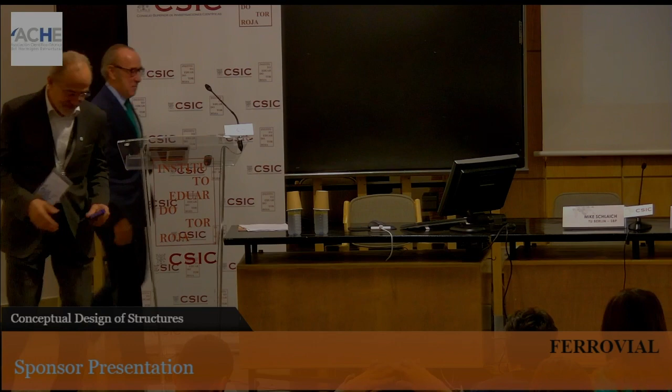This is the, let me see if it's

Okay, very good. So again, inspiration is the motto of this section of the conference. I want to tell you a little bit about a few engineering cases where inspiration came to us, and we were able to modestly push the envelopes of our work as engineers. And as you know, when inspiration comes, they say that it needs to find you working. So after every inspiration, the engineer's work means that you still have to spend many, many hours developing your design.

First, just a little bit about Ferrovial. Most of you know us. In operation since 1952, market capitalization around 19 billion euro. These are the countries where we have a presence in the world, and we are very focused on the USA nowadays, which represents more than 40% of our activities. So that's all that I want to say about Ferrovial.

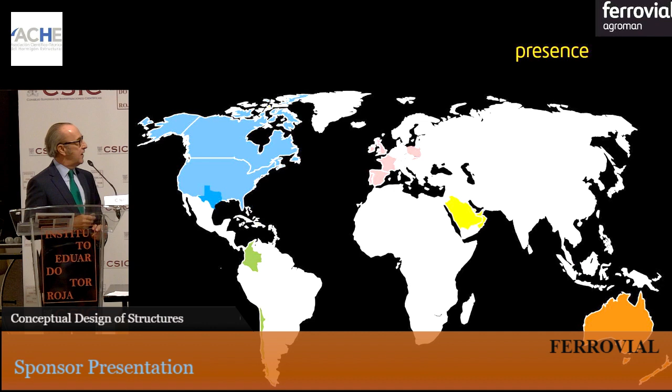Let me move on to the inspiration examples. I think we are running short of time, so I'm going to skip this one. First inspiration, structural, and as you will see, I'm going to go from the more small scale examples to the larger scale examples. And if you bear with me, I will finish with a very large scale example, which is not strictly related to engineering, and then with that I will end my presentation.

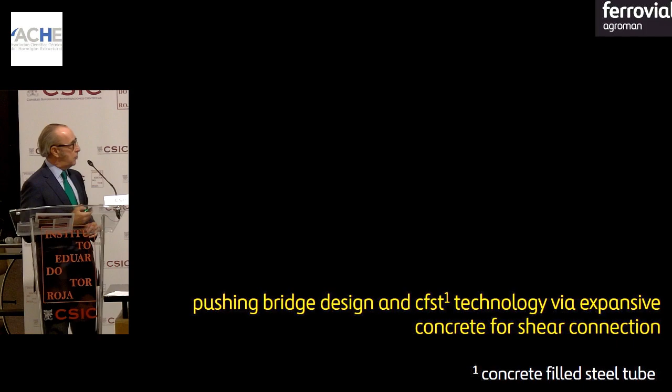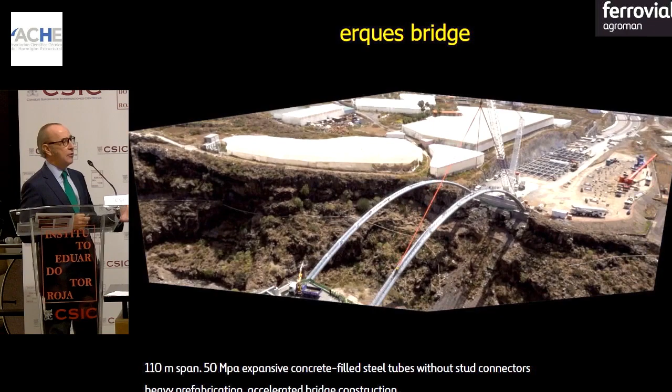So first case, a structural project. This is a bridge in the Canary Islands that we designed in-house. By the way, we worked on some of the testing that I'm going to show with the Instituto Eduardo Torroja, and it's the first example of inspiration. You can see the bridge relies on modular construction, heavy prefabrication. It's almost verging on the field of ABC, accelerated bridge construction.

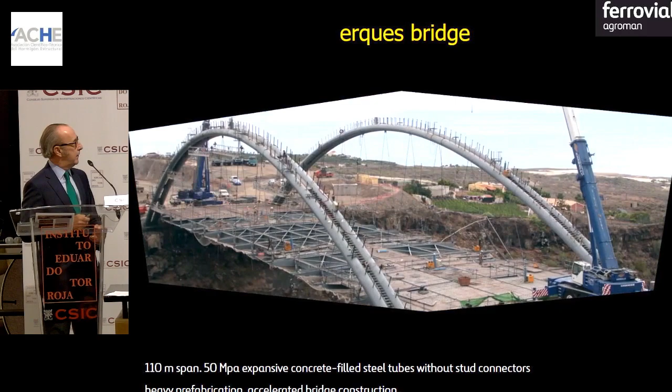And I want to focus on the 4 steel tubes that are supporting the deck. Once the video is over, I will tell you a little bit about it. As you know, traditionally, engineers have relied on shear studs or shear connectors to make sure that the concrete inside the steel tubes and the steel work together. I have here a little prop. So just to make it more fun, this is a real scale size of each one of those steel tubes. You can see the concrete inside and the connector.

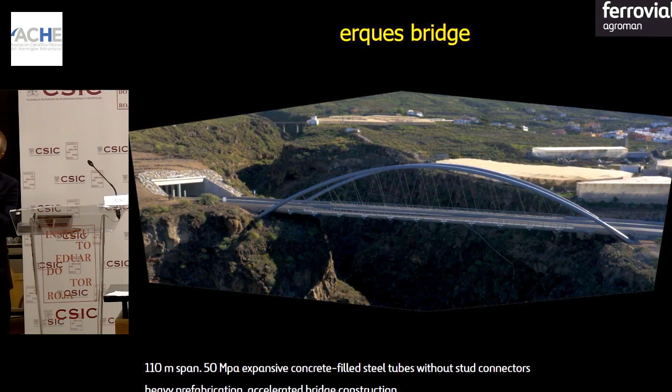So here the inspiration was, can you do something with expansive concrete, to try and get rid of the shear studs, and of course with a proposition like that, as the responsible engineers, you need to start testing. These are the tests that were conducted at the Instituto Eduardo Torroja. Of course, you need to model temperature effects, both uniform and non-uniform heating, to make sure that there will be no slip between the two materials. And in the end, this was the result. Concrete filled steel tubes without stud connectors.

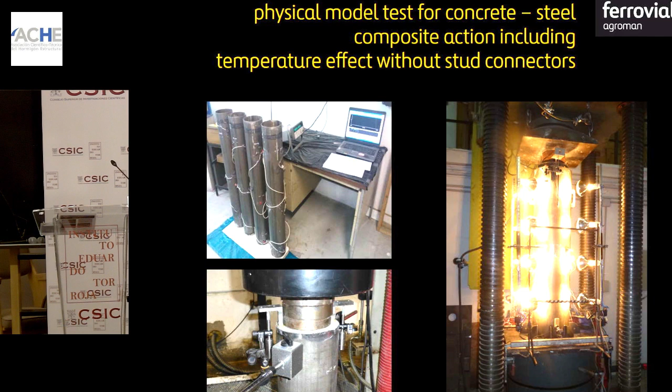And I thank very much Javier Gras, who's here, one of my collaborators, for carrying this over all the way

from the office. So next, going up one step, we are moving more into the field of conceptual analysis of potential engineering solutions. As you know, soil structure interaction is an important issue. Hugo is going to remember this case because we worked together on this problem. Here we modestly pushed the boundary of soil structure interaction, making geotechnical models and structural finite element models work together.

As you know, geotechnical FE models can be very good at depicting the soil properties. You can make them as complex as you want, nonlinear soil behavior. You can have the piles slide with respect to the soil to model negative friction, what have you. But those models are not so good in representing the structure. And for structural FE models, the opposite is true. So this was the first case where we coupled both models together. And this is a view of the geotechnical part of the model.

I'm going to run a very simplified simulation. This, so to speak, would be the first iteration, in FLAC, the geotechnical FE model, where the building is modeled in a simplified form. The drilled shaft foundations are modeled in great detail, and then you start the execution of the two tunnels that are going to run under this building, and in so doing will cut through 67 piles of the foundation.

It's a partly historic building in London. It's partly, as I said, classified as a historic building, big structural masonry walls. So of course you want to make sure that nothing happens to the building, and you need to evaluate potential damages and design mitigation activities.

Red here is good. Sorry, it should be the other one. Red is zero settlement. And now we start the excavation of the tunnels. Of course, you see the arching effect of the building, and in doing so, you can calculate essentially the reactions, the loads that each of the

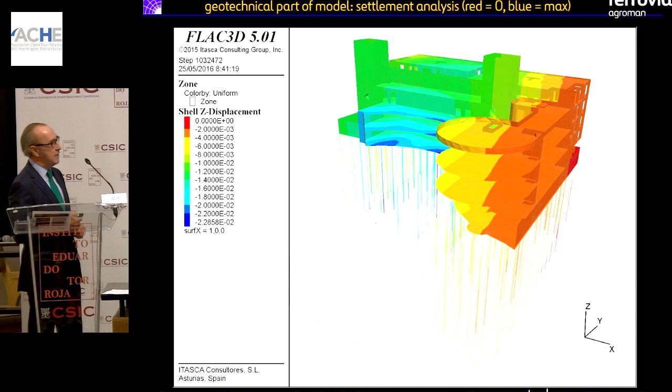drill shafts is carrying. Of course, prior to a model like this, there was extensive pile load testing on the site, because with such a complexity, as engineers, you need to make 100% sure that you are representing reality. This is the structural part of the model. This was done in Sofistik.

You can impose the movements of the drill shafts onto this model, which is much more detailed from a structural standpoint, and then you can run the structural part of the model, obtain the reactions on the drill shafts, and then the process starts again. And at this time, we did the combination of both models in a very crude way.

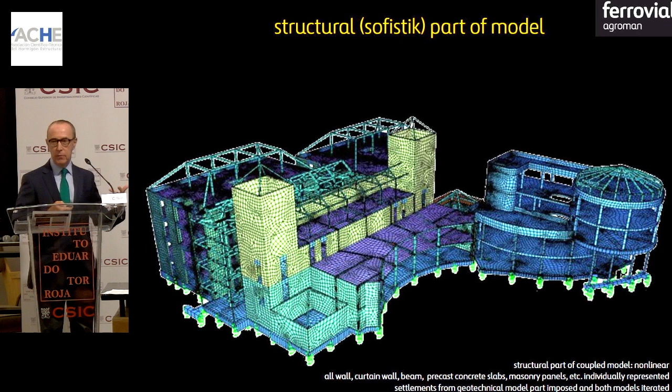Nowadays, software has been developed that can make them run seamlessly, and you can cycle through as many iterations as you want. This opened a completely new set of opportunities for us, and we have used it in several complex geotechnical structural analyses. And of course, ultimately, you can check your failure criteria, in this case for some of the masonry walls in the building.

Next example, and this has nothing to do with structures. It's really from my own field. And we're going one step further in terms of the scope of the project. This really is looking at the whole concept of how the project should be conceived. Two important concepts here. Public-private partnerships, or PPPs or P3s, are projects which involve not only construction, but also the financing and the operation and the management of the asset over many, many years.

This is, in particular, a toll road in Dallas, in the USA, and there are two interesting concepts associated with this type of P3 that our company has developed many times in several places, including the US. Traffic risk means that your revenue is associated to how many cars drive on the facility. So in a project like this, a concessionaire should act as if you were the owner of a restaurant. You want to entice customers to drive on your facility. You want to provide a good service so that they come back.

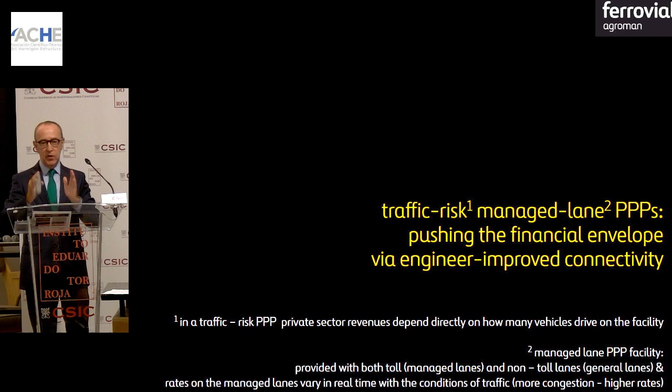times to your users. So in a case like this, the challenge is you want to try and provide as good a service as possible and improve connectivity. And in this example, the construction cost of this project was approximately $1 billion.

You can see on the left, I don't know, is there a laser here? Oops.

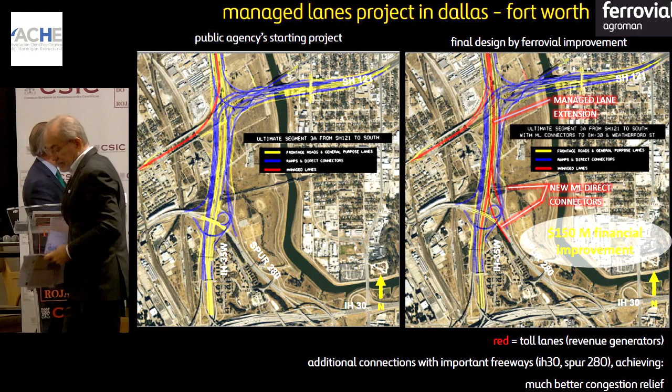Good, okay, excellent. So you can see red is the important color. Red are the managed lanes. These are the toll lanes, the lanes that generate revenue. This on the left is the project as we received it from the public agency. The toll lanes go into downtown Fort Worth, and a very key aspect.

You see here IH-30. This is a very important transportation corridor between Dallas and Fort Worth, key in the area. This project was not doing anything to reduce congestion in this important interchange or alleviate congestion on IH-30. Why? Because really the challenge, it's not that the people who thought about this project for 15 years, maybe they thought of it, but there were two difficulties.

One is the land occupation. It was difficult to get additional right-of-way for construction in that area. And also during the public planning process, quite often, there is not an advocate to treat a project like this as a business. So our solution, this is how the project has been built, is shown on the right.

Managed lanes were extended down farther south, and really this is where the inspiration came, that there was this little section of freeway, Spur 280, already connected to IH-30. So the eureka moment here is to connect the managed lanes to this short spur, and this is what provided complete connectivity with IH-30. Nothing to do with the structures. This is a simple idea, but someone has to see it.

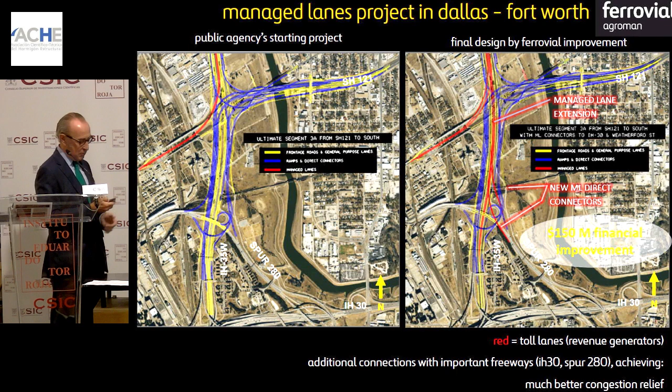And I think I have the last example, very removed from the field of engineering. Please bear with me. I was reading the definition of inspiration in many dictionaries, and there is one thing in common. Inspiration is a motion not only on the intellect, but on the heart as well. You can be inspired to altruistic behavior, you can be inspired by a person, and to me, what I'm going to show is a big source of inspiration.

And I apologize because it is very removed from the field of engineering, but after the excellent presentation by Mike Schlaich, what I'm saying here is very humble. This is not anything that has to do with my potential achievements, but it makes me very proud as a human being and as an engineer, and it's a big example of how good we can do professionally.

I wanted to leave the group with this idea, hoping that the sessions in these 2 days are very fruitful, and convey my thinking that to me this has always been a big source of trying to be better as an engineer and serve society. And on the other hand, engineering is a lot of fun, so on the selfish side, it's important too.

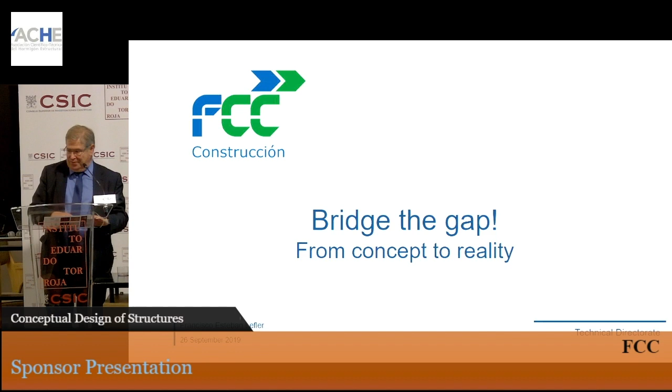With so short a time, what can I say? I decided to choose 5 flashes of 5 activities that we lived, interesting concept designs that went into reality, where FCC, together with the consultants and the engineering, solved problems that sometimes arose during execution and were not directly derived from the conceptual design. I'm sure Professor Corres will recognize some of his really nice values in these activities, and some of the attendees too. I will go a little bit fast through this.

I will talk first about the Mersey Bridge. The Mersey Bridge is a real structural breakthrough within a challenging environment. It has just been awarded by IABSE the Outstanding Structure Award in 2019. You can see from the picture it's a cable-stayed bridge with 3 pylons, but it is also placed in a very sensitive environment in estuarine waters.

That means that the ecosystem where the bridge is placed is extremely sensitive, with a really complex biological structure, and it was a real challenge just to be able to tackle this complex structure in such a complex environment. Of course, the bridge was addressed with the technical tools needed for the structure, but in parallel there was an environmental management scheme that was key in going from the concept design to the reality.

The construction was carried out by balanced cantilever with a temporary trestle, and obviously this trestle was on piles, and after finishing everything had to be removed. The aim was having the minimum interaction with the water flow, the water dynamics inside the estuary, and once the structure was retired, everything was recovered.

In parallel, several PhD theses were performed and sponsored by the construction JV on the ecological values of the area. And also, there was a continuous interaction with the population in the surroundings. There was communication in both directions that really made this work a success.

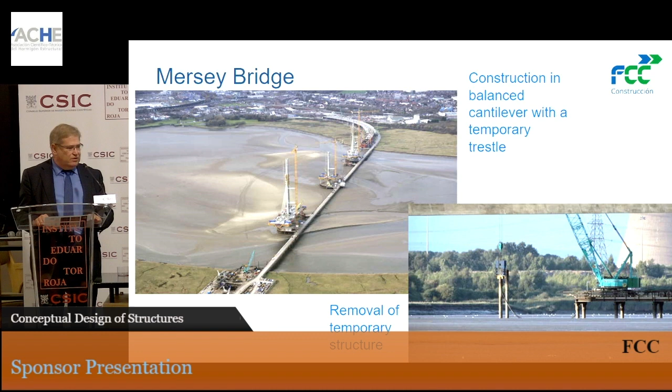Another one is the Almonte Bridge. This is a high-speed railway bridge. It's an arch with 384 meters of span. When it was finished, it was a world record in concrete bridges for high-speed railways, and now probably there are other bridges with some more span. And the cross-section is quite complex. From two hexagons that are separated at the abutments, they go to a single octagon at the key. That's why it's a little bit complex. It was overall winner of the ACI Excellence in Concrete Construction Awards in 2018.

You can see at the center the change in the formwork from the section at the abutments, changing smoothly to the octagon. You can see at the right the transition. It was a complex formwork that we were advancing there. And the construction was carried out by two cable-stayed cantilevers.

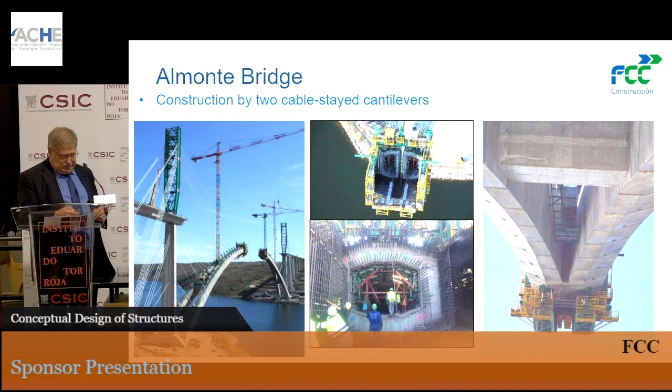And there came a structural challenge from the construction process, from the method statement: obviously we needed temporary towers for the stay cables to be able to connect the bridges. That was very complex at that site, and the key of our in-house team, the special works team, was a really ingenious frame that allowed us, by vertical rotation, to place the erection towers that served for the auxiliary cables to be able to construct this bridge.

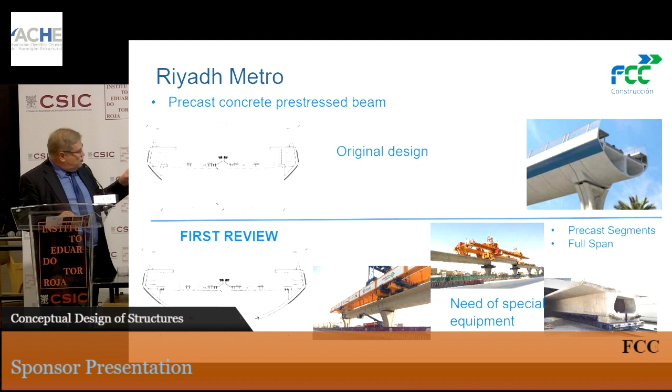Another experience is the Riyadh Metro. Here we will see the interaction of the construction equipment with the design. The original design is up on the left, with a really complicated beam for handling, for pouring the concrete, for placing it. And some of the lines were directly constructed with this solution. But in our line, our construction joint venture decided to go a little bit beyond, trying to simplify. Then with our engineering partners and our in-house engineering, we did a first review changing that complex beam for a caisson beam where the webs were closer to the loads of the railway, and structurally it has some advantages.

Several sections were built with this solution, with precast elements for the full span sections. The question is that we had several lines with a lot of this kind of viaducts, and this solution required very special erection equipment. Special erection equipment means it took time and a lot of money to have many more teams available on site. So in order to strengthen and make the construction more reliable, a further step was done.

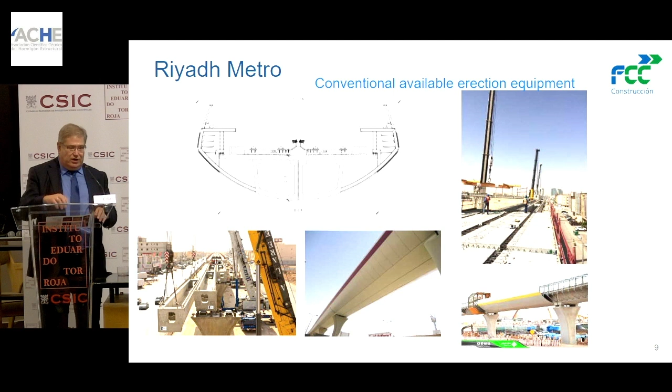That's splitting this big caisson beam into two half beams, so the section could be addressed with conventional erection equipment. That means a more robust structure. It's easier to replace a crane than a launching gantry, and this allowed us to tackle the challenge with more reliability in time and in cost. Obviously, it was necessary to recover the original aesthetics. That was no problem. You can see there how it was recovered; it is practically the same as the original design.

Another experience was the Fernando Reig Bridge in Alcoy, where the project consisted of the replacement of the full set of cable stays of a cable-stayed bridge that had several decades of life. There was a breakage in one cable, there was a structural inspection, and then the administration decided to change all the cables. Then we started to work together with the designers, thinking about the problem.

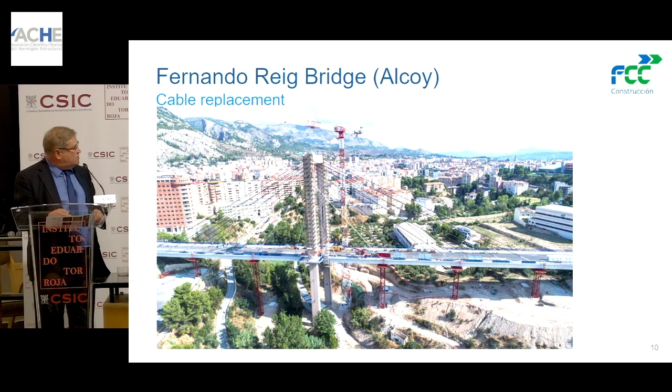A procedure was developed, of course, of releasing the tension while controlling from the towers behind with jacks, controlling the reaction in the adjacent cables. But in the next stage, when we were going to release that tension, it happened that the tension could not, in general, except in very few cases, be released as it was prepared, with the jack simply taking the cables with the clamps.

There was a general lack of free length for anchorage, and also some of the cables were corroded. And then everybody had to think a lot to go for another, more comprehensive solution. Well, the final alternative method was based on friction clamps to take the cable, with a capacity of 5,000 kilonewtons, actuated by jacks and rods.

So the procedure was the removal of the duct that protected the cable and also of the cement grout, because there was no friction capacity for working with the clamps. A special compound was designed for filling that gap and clamping the ducts. And then with post-tensioning bars, the tension was transferred to these bars.

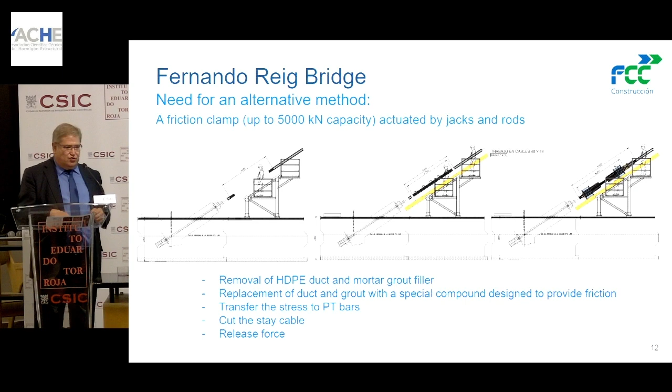Then the cable could be cut without tension, and then the tension could be released smoothly, reproducing the general structural scheme. You can see there the device with the clamps, the post-tensioning rods, and all this situation. Well, we have to say that the scheme was really successful.

Now I will go to a couple of R&D projects. R&D projects seem closer to the scientific side, but from the construction part, from a contractor company, the so-called valley of death seems wider. But sometimes with a good interaction with the researchers, if you fix well real problems, you can find answers in the research.

There's one paper from the 1930s called "The Usefulness of Useless Knowledge." Sometimes researchers are researching topics whose clear application they don't really know, or which are the answer to real questions in the industry, and that communication is sometimes very fruitful and provides very good results.

This is a centralized system. It's an R&D project that's ongoing now. It's a system for monitoring linear infrastructure construction based on, well, here we say high-performance drones. I would not say that after hearing the presentation by Professor Ratti. They are simple drones, and one of the aims of the project is the development of the drone itself, a drone capable of a lot of data collection and of inspecting linear works.

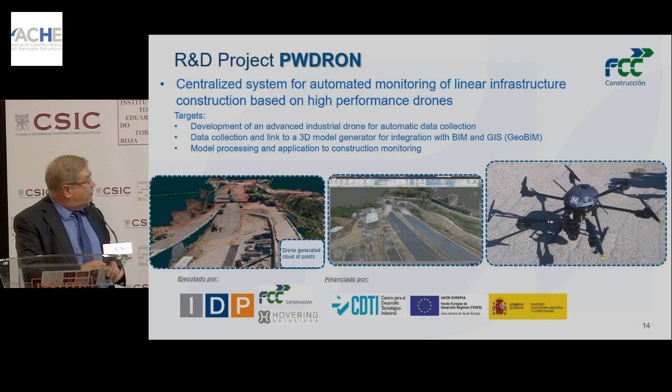In this case, you have to perform maneuvers of towing caissons, placing them by sinking and ballasting with salt water, with an accurate placement. So you have to build a breakwater that's a straight line with reasonable tolerances between caisson and caisson. And in many locations in the world, this is a really difficult job because you have very few weather windows where you can work with this accuracy.

In this case, this project was defined after our experience in several real projects where we were lacking some kind of technological development that could give us a reliable procedure to do this, and a reliable procedure also for analyzing the real climatic thresholds of that maneuver.

Let me introduce myself. My name is Mariano Martín, and I'm in charge of the Structural Engineering Department in ACCIONA Engineering. What I'm going to try to do this morning, in only 15 minutes, is give you a general overview of what ACCIONA is, what our core is, which I'm going to try to sum up in only two words, how we are divided, and finally, we are going to land in the engineering and innovation part of the company. Let's start then with the first part of the presentation.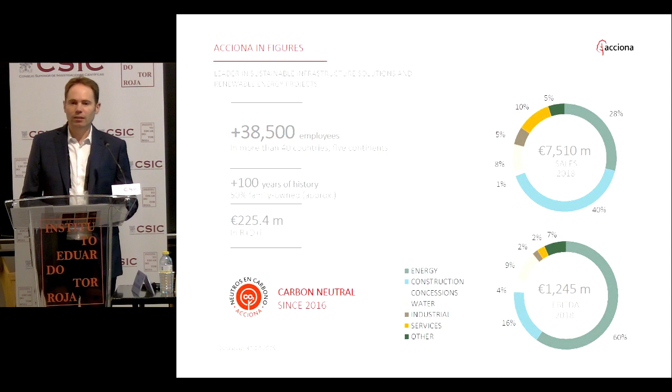What is ACCIONA? ACCIONA is a global company. We are a global leader in infrastructure, water, services, and renewable energy. We are more than 38,000 employees all around the world. This is a company with more than 100 years of history. And we invested last year, in 2018, more than 225 million euros in innovation, research, and development.

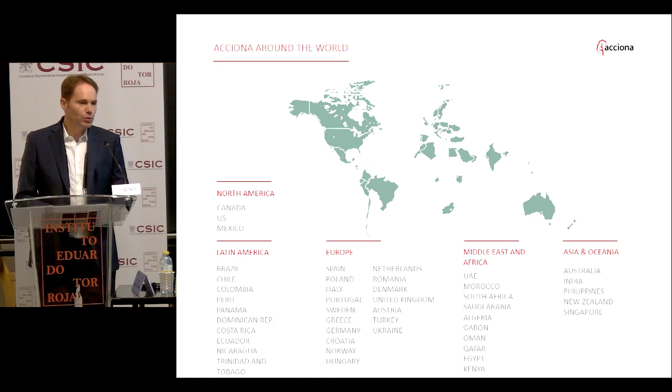Where are we located? Mainly we are located here in Spain, but we work all around the world. Now we are focused in the north of Europe, mainly in Norway, Canada, and Australia. But as you can see, we are based all around the world. Let's go to the second part of the presentation. If we have to sum up the core of our company, we would say that ACCIONA is a sustainability and innovation company.

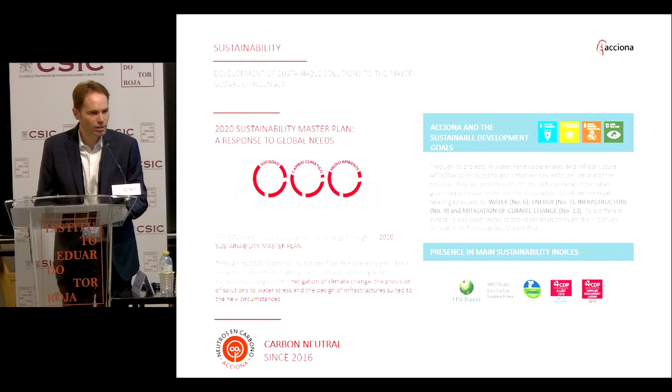Since 2016, we are a carbon neutral company. We have a 2020 sustainability master plan. We are very worried about mitigation of climate change. For example, this week, our president, José Manuel Entrecanales, is in New York in the meetings related to climate change. We are focused against climate change and water stress, as you will see during the presentation, and our aim is to design infrastructures suited to the new circumstances.

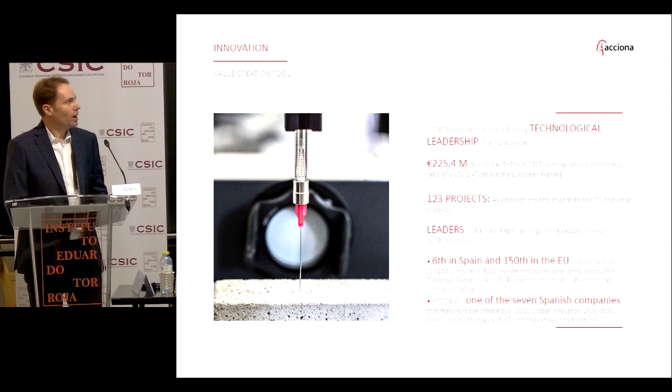Moving on to the other part, innovation. We are involved in more than 123 projects related to innovation. And here in Spain, we are the 6th company in innovation. Moving on to the next part of the presentation. ACCIONA is divided into two main branches, energy and infrastructure.

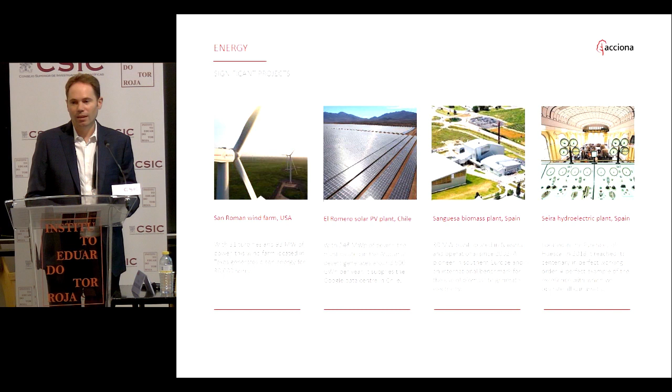If we move on to the other part, the infrastructure part, it is divided into construction, concessions, water, industrial, and services. Starting with the water part, our aim is to fight against water stress in the world. We have constructed, or are constructing, more than 75 desalination plants. For example, with ACCIONA Engineering, we collaborate with ACCIONA Water. We are designing a lot of desalination plants in the Middle East, namely Jubail, in Dubai, in Saudi Arabia, Al-Khobar.

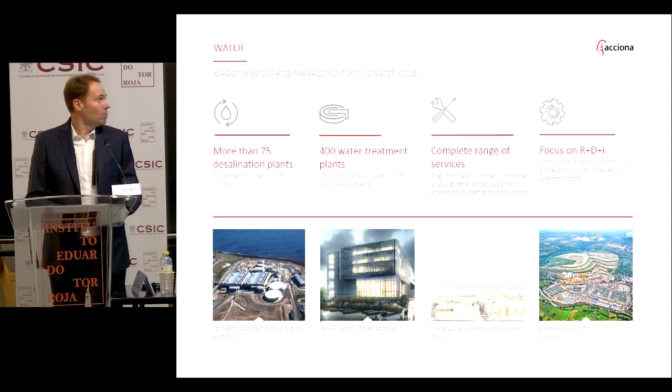Also, we are involved in the construction of more than 400 water treatment plants. Now we are working hard in Vancouver, with Metro Vancouver, in the Lions Gate water treatment plant, and completely focused on research and innovation. Just to give you an example, we have a patent in an RO system, reverse osmosis system, and we have our own system to be applied in the desalination plants.

If we move on to the industrial part, most of our projects are EPC projects or turnkey projects based on energy. For example, from ACCIONA Engineering, we have collaborated with the industrial division in the construction of a lot of photovoltaic plants. Last year, we finished the Reynosa and Mesa La Paz wind farms in Mexico with more than 200 wind mills. And of course, the thermosolar plants here in Spain, Hornachuelos, Olivenza, but also in Morocco and South Africa.

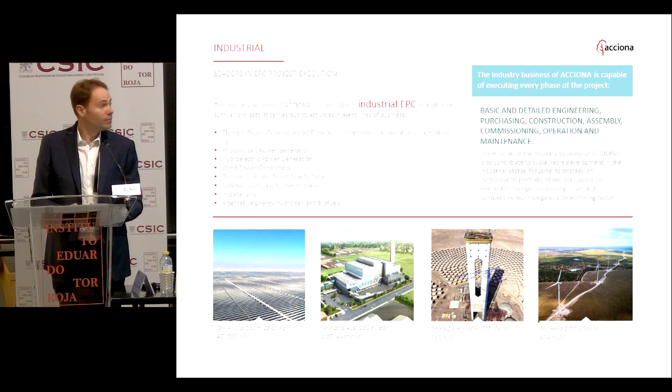Services. I'm only going to give you one fact. Since there are a lot of young people in this Congress, we have started here in Madrid with a motorbike sharing service. I'm sure that you have seen a lot of these motorbikes, all electric, and I strongly invite you to use them this afternoon in this Congress.

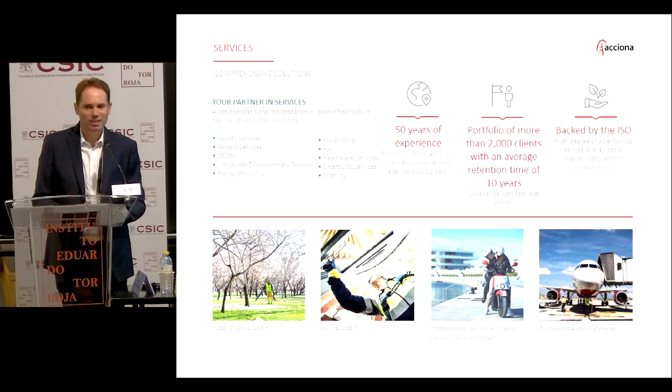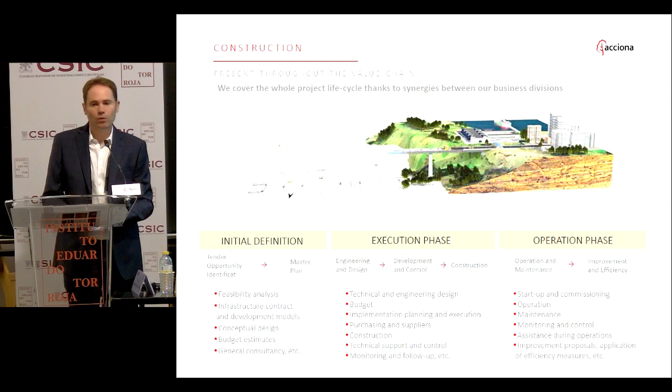And concessions is the other part of the infrastructure. I'm going to skip this part and go directly to the construction part of ACCIONA infrastructure. Our aim is specialization, self-performance in-house, and of course creativity and innovation. We are involved in the whole life of the projects, from the very beginning with the opportunities, with the tender. Then, of course, during the execution phase, we carry out the detail phase. We help during the construction phase with our technical assistance, and of course, in the maintenance and operation phase.

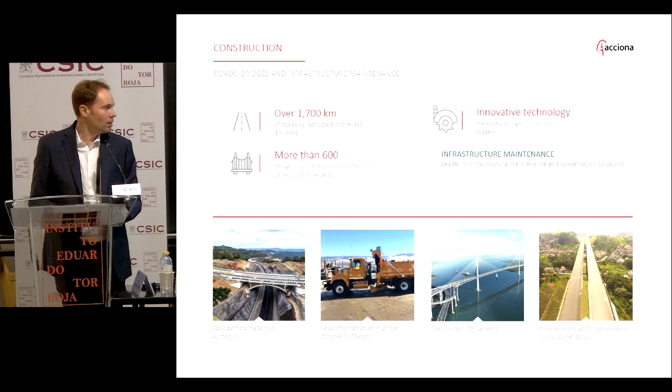Okay, the construction part is divided into three: road and bridges, tunnel and railways, and special projects. Related to road and bridges, I'd like to highlight in the bottom part a cable-stayed bridge under construction in the Philippines. It's Cebu Bridge. I will go back to this project later. And also, I would like to highlight the innovative technology that we have related to the truss block system to push the bridges. It is completely patented by ACCIONA.

Moving on to the railway department, just to highlight that we have developed a tunneling machine control center. Using big data, we are able to get all the data that come from all the TBMs of ACCIONA all around the world. With our own system, we have developed software to be aware of what is happening, and in real time to be able to make a decision.

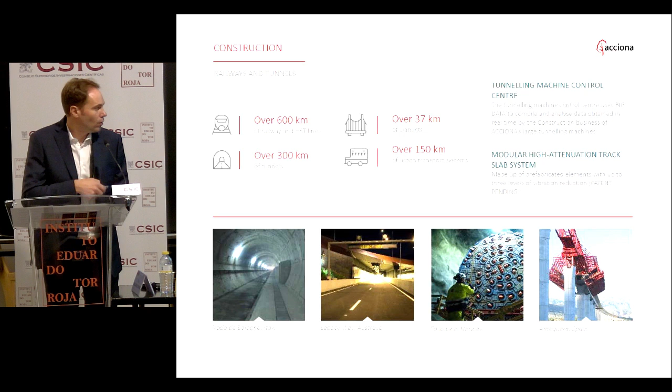Here I would like to highlight the Follo Line project, which is under construction. This is an EPC. ACCIONA Construction with Ghella are the construction company, and ACCIONA Engineering is the engineering firm that is in charge of all the design of this project.

Let's move on. This is the special projects area. I would like to highlight that we have constructed more than 60 harbors around the world and more than 50 dams. We have constructed the largest reservoir in Western Europe. It is located in Portugal, Alqueva Dam. Okay, and also we are the owners of 3 floating docks that are able to construct caissons.

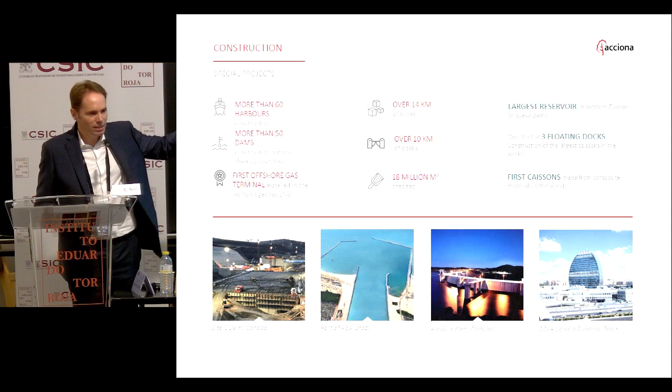Hugo, Thor, when I was 2 years ago in the conference related to submerged floating bridges, I think that the idea will be to use this kind of devices, because we are able to construct the docks in the sea, and the idea will be to adapt that kind of caissons to do the future bridges below the sea.

Okay, we are arriving to the last part. This is the engineering and innovation part. ACCIONA Construction has 2 companies, ACCIONA Engineering and a technological center. I'm part of ACCIONA Engineering. We are more than 300 people here in Madrid. We are in charge of the technical services of the construction company. We help the company, for example, to study construction processes. You can see here the abutment of an arch here in Spain.

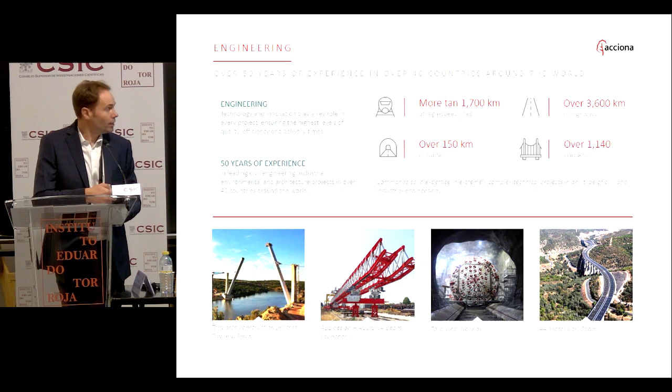Moving on to the technological center, we have a center here in Madrid with more than 100 people working in innovation related to construction, materials, construction processes. And together with the engineering firm, the innovation part, and the construction company, to finalize, I'm going to show you some real projects where creativity, innovation, and engineering are together.

The first one is a carbon fiber bridge. It's located here in Spain, in the north, in the Cantábrico-Asturias highway, 45 meters in 4 spans, 10, 13, 13, 10. Okay, it's made of 3 continuous carbon fiber beams. You can see the construction process, also the deck view from the bottom part, and finally the loading test. It was made in 2004, and it's working perfectly nowadays.

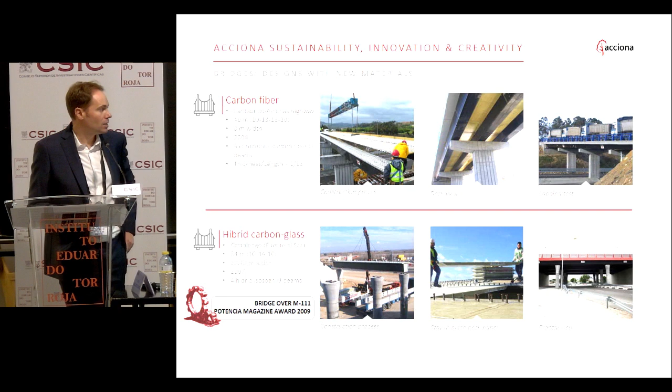If we move on to the next experience, then we continue with a hybrid carbon glass bridge here in Cotolengo in Algete, 20 kilometers away from this site. It was 2007. We used 4 hybrid isospan U-beams, and the same, you can see the construction process. Also, the way that we put on site the deck panels with only 2 people, and a general view of the bridge.

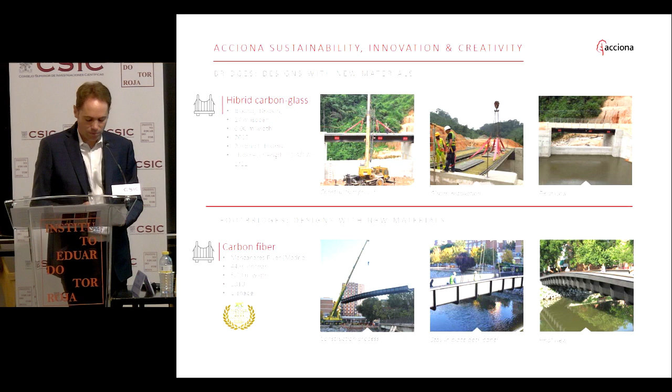At the end, due to the handrail, we have to put a really high rail to avoid people to throw through the air. But I think that it was a really nice result. And related to footbridges, I would like to conclude with the latest, with the first 3D printed concrete footbridge made in the world 2 years ago.

ACCIONA has 3 concrete 3D printers now. 2 of them are located in Madrid, and the other one is located in Dubai. And we are starting now studying the 3D printers in metal, in steel.

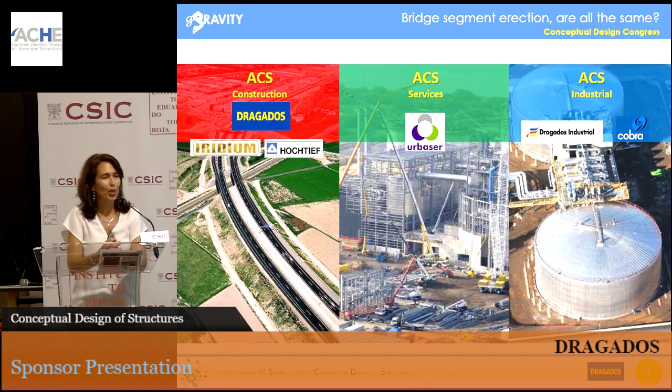Good afternoon, everybody. It's a pleasure for me to be here with you and introduce my company, DRAGADOS. First of all, just a little information about the company, because you might not know it. So, DRAGADOS belongs to ACS group. It's an international construction group. DRAGADOS is the main construction company. Also, Hochtief is part of that. DRAGADOS is in the construction area, but there is also a service area and also an industrial one.

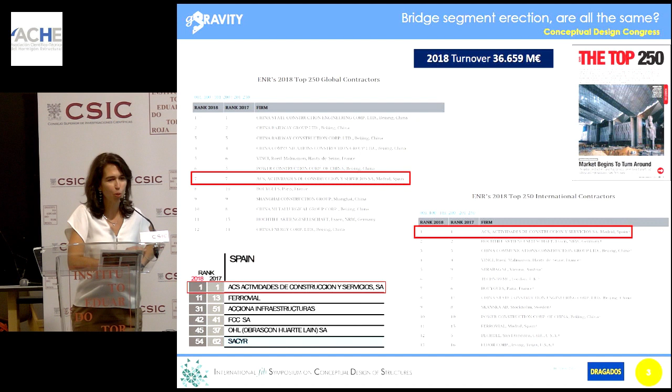ACS is the first construction group in Spain, as you can see here in this rank. We are the 7th in the world, but pay attention that the first 5 are Chinese companies, so only Vinci is ahead. And as international contractors, we are in the first position because we work all over the world, as you are going to see.

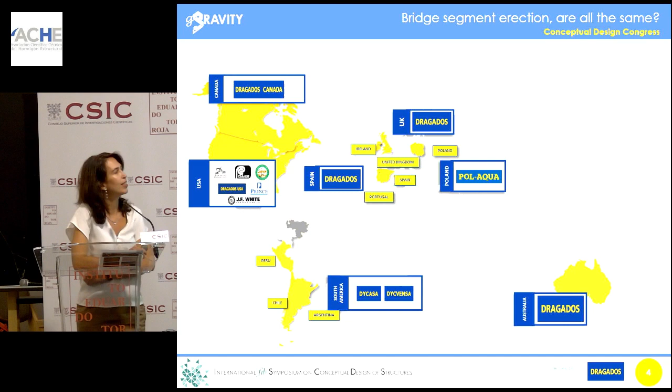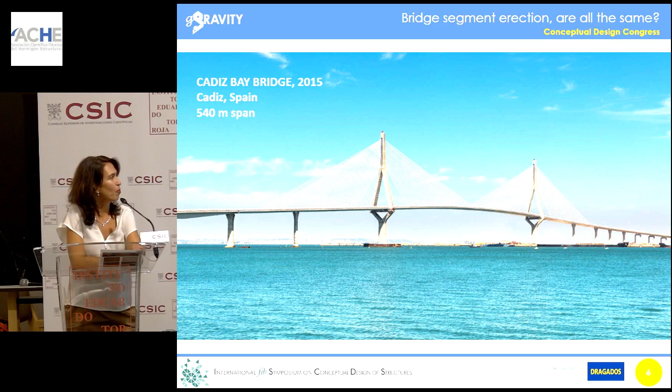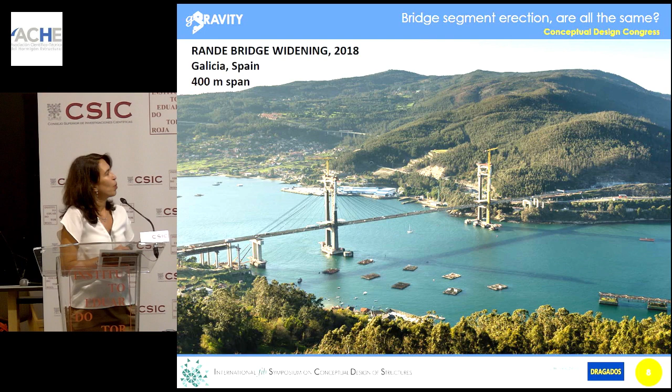Last year, we finished the widening of Rande Bridge in the northern part of Spain. It was the first time ever a cable-stayed bridge is widened by placing 2 new decks at both sides of the existing bridge. That was a very interesting work also.

And the last one has been this year. This was the new Champlain Bridge in Canada, in Montreal, over the St. Lawrence River. Although this span is shorter than the others, with only 240 meters long, this was probably the most difficult bridge to erect, because of some considerations we will see later.

So talking about cable-stayed bridges, we still have 2 under construction. This one is on the border between Canada and the United States, over the Detroit River. It will have 853 meters long, and that will be the longest cable-stayed span in North America. So we are still under construction. We are with the foundations.

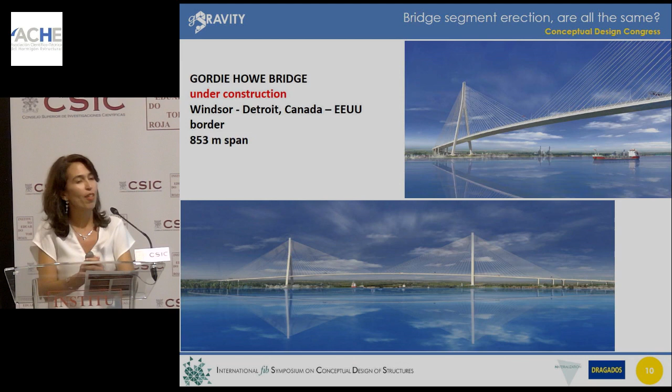And the other that we are building now is the Harbor Bridge in Texas, in the United States. This is a concrete deck and will be a world record in cable-stayed concrete deck, with this over 500 meters long. So, as you probably know, erection procedures are paramount when dealing with these cable-stayed bridges.

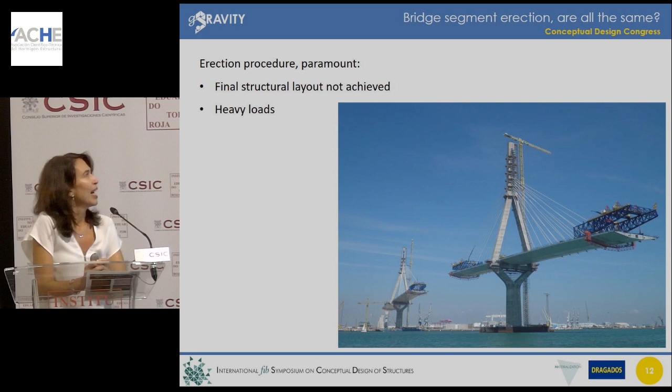Why? Well, because of 2 reasons mainly. Because we have to deal with a structure that is not finished. The structural layout of the bridge is not the final one, so the situation is, let's say, more poor. And in this situation, with this non-finished structure, we have to deal with really heavy loads. Heavy loads that are a lot bigger than the loads that are going to be over the bridge during its service life. So we put together this non-final structural situation with these huge loads, and we have something important to solve.

So the erection procedures that we use for cable-stayed bridges, well, the most used one is the cantilever procedure. We have 2 options for the cantilever method. We have the balanced cantilever, when we have at both sides of the pylon cantilevers that have to be balanced, like in Cádiz Bay Bridge, in this picture that you see on the screen. And the other option is the single cantilever, and it's when you first erect the back span on a shoring system, and when the back span is finished, you start to erect the main span with the cantilever.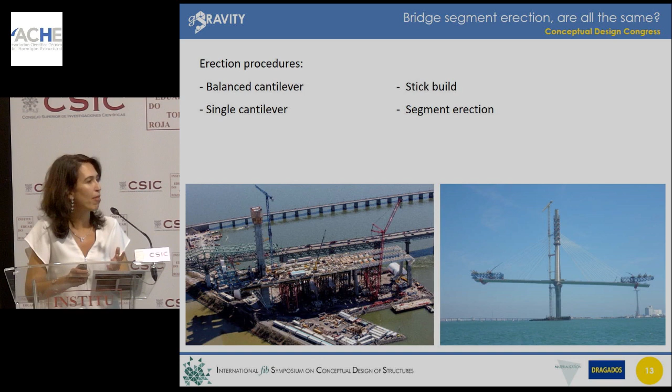There is another difference in this cantilever erection according to the segment or the kind of element we lift to the deck, and we have these 2 options, the segment erection and the stick build. In the segment erection, you build the whole cross-section, a segment of the deck, you prefabricate it on a yard, and then you lift it all together. This is the segment erection. And the other is the stick build. In this situation, you just lift to the deck single elements, and you fabricate, let's say, the cross-section up on the deck. In this presentation, I'm going to focus on the segment erection because it's the most common one and is the method we have used in these 4 examples that I'm telling you about.

So, talking about this erection procedure, so cantilever method together with segment erection, we have found that there are 2 problems to solve. Remember that it's important to build these bridges because when we build a bridge, we learn a lot of things, so for the next one we know more and so on. So we are learning in each bridge, so the next one we will do even better than the previous one.

So we have found that these two problems are paramount to solve, and this is how to transmit these huge erection loads that we have over the permanent, non-finished structure. This is the first question to solve. And the second is how to assemble this segment, that during the lifting deforms due to its self-weight, to the structure that has a different shape. So these are two problems that we have to solve. So let's see both of them because they are interesting.

First of all is how to transmit erection loads. Well, we need a special device. We can call it lifting gantry, erection traveler. There are many ways to call it. But we have to think how to design it because it's paramount to the impact on the structure.

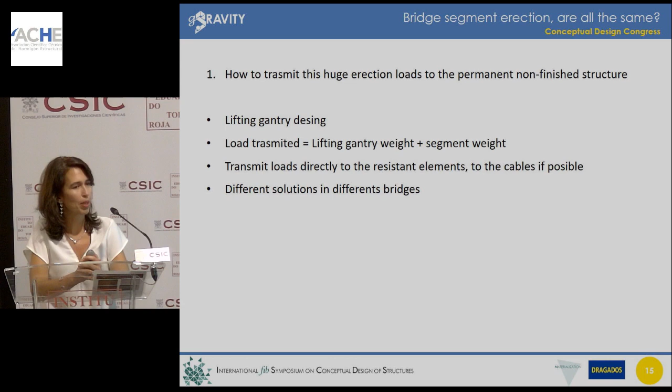So think that the load we are going to transmit to the non-finished structure is the weight of the lifting gantry together with the weight of the segment, which is a big amount of tons, you are going to see now. So the idea is to transmit these really heavy loads directly to the resistant elements. So if possible, to the cables, to try not to oversize the permanent structure. So this is the main idea. So as you can imagine, there is not a magic solution, an only solution, and we are going to see now how we have solved this problem in these 4 bridges that we have finished in these 5 years.

First one was Cádiz Bay Bridge. Here you have the lifting gantry. We designed this lifting gantry in-house in DRAGADOS. And in this case, this lifting gantry was designed not only to erect the segments, but also to lift the full depth precast panels. That's the reason why this lifting gantry was so heavy and so big. It weighed over 500 tons for a maximum segment weight of 400 tons, which is quite big. So in this case, you see here the lifting gantry.

It moved over these rail beams. The rail beams were supported at the diaphragms of the steel structure, and the diaphragms brought the load to the cable stays. But this was the support system only for the movement of the lifting gantry, because when a new segment was going to be lifted, imagine that in this situation we had to withstand almost 1,000 tons, so 500 the lifting gantry plus 400 of this new segment.

In this situation, the lifting gantry was designed to deploy a new support, as you can see here. So the idea was to transmit this really heavy load directly to the stay without penalizing the structure of the deck. That was in Cádiz Bay Bridge.

Next one was Queensferry Crossing. In this case, the problem was a lot easier to solve because the lifting gantry was very simple. Imagine that for a 750 tons maximum segment weight, the lifting gantry weighed only 215 tons. So in this case, the lifting gantry was located over the resistant part of the section. As you see here in the cross-section, the lifting gantry transmitted the load directly to the webs and to the stays. So in this situation, the situation was easy to solve.

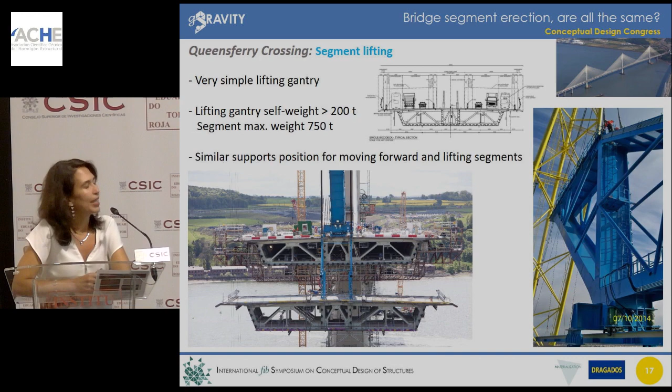Next one was the widening. In this case, for this widening, you see here that this is the existing bridge and this is the new part, the expanded part. In this situation, we need two travelers to place the new segments because the expanded deck couldn't resist the total load, so we need to share it. And we couldn't place the lifting gantry in the existing bridge either, because we couldn't affect the traffic. We had to perform all the works without affecting the traffic at the existing bridge.

So we designed this system with these two travelers, the front traveler located in the existing structure and the rear traveler located at the expanded deck. So here is a sketch of the front traveler. As you can see here, this structure was hung from the main girders of the existing structure, but when a new segment was going to be lifted, these red PT bars were tensioned, so the load of the new segment was transferred directly to the cable stays without affecting too much the existing structure.

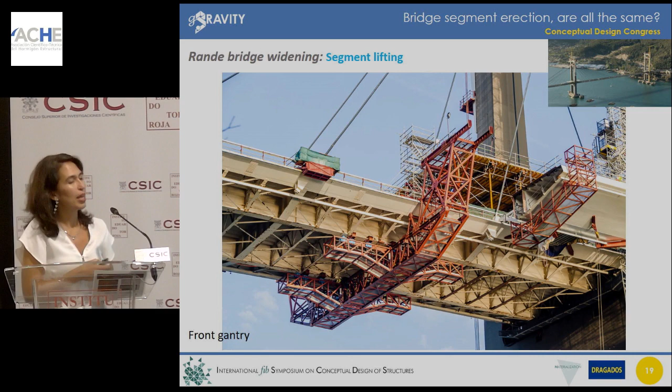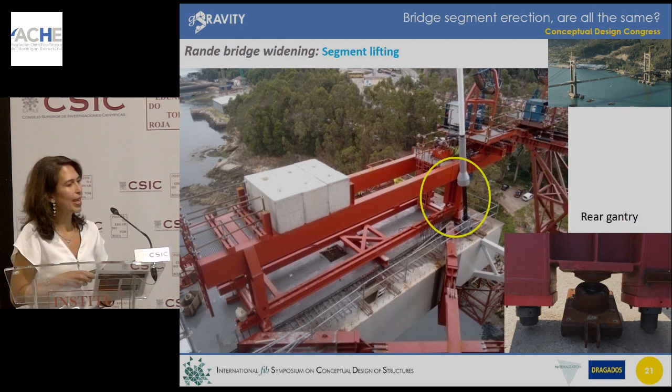Here you have a picture of this front lifting gantry and see how it was rolling below the main girders of the existing bridge. The rear gantry, the one that was located on the expanded deck, was a lot simpler. It was a steel structure over these rail beams. The rail beams were supported at the diaphragms of the structure also. Remember the idea of transmitting the load directly to the resistant elements. But when a new segment was going to be lifted, again, we have a special support to transmit the load directly to the stay without affecting too much the steel structure.

And the last one was Champlain Bridge, the Canadian one. Well, this was a very complicated bridge. The geometry was really complex also, and I'm sorry for saying this, but I think the structural behavior was not taken into account in the initial concept of the bridge, so that brought us a lot of problems. Because if you see here, this bridge is made up of 3 independent corridors, a central one and 2 lateral ones. But in the cable stay section, which is what you have in the image, these 3 corridors are connected by crossbeams, as you can see in this other drawing.

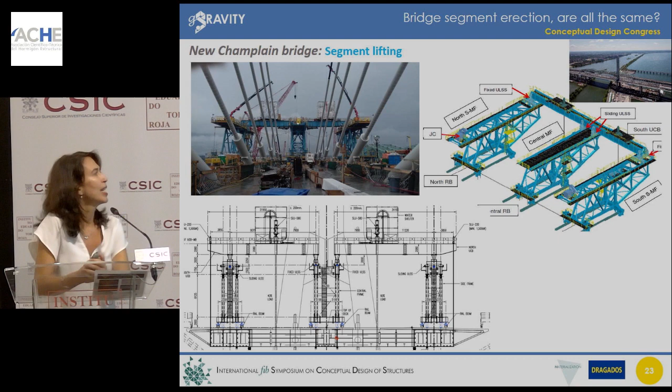You can see also here the 3 corridors, and you see these white elements. These are the crossbeams that connect the 3 corridors, and it's the place where the stays are anchored. So the stays are not anchored in the longitudinal elements, but in these transverse beams, which was really crazy from every point of view. So in this case, the design of the lifting gantry was complicated because we had to adapt to this complex geometry. Since the deck had these 3 corridors, the lifting gantry needed to have these 3 elements also to transmit the load directly to the resistant elements, which were the box girders of each deck.

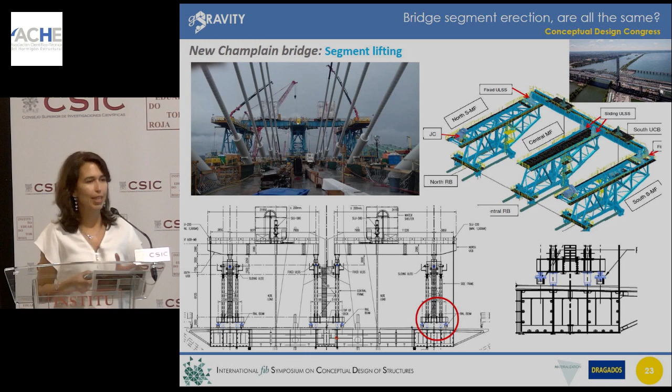So again, like in the other bridges, we have these rail beams for the movement of the gantry, but when a new segment was going to be lifted, a special support was used to transmit the load directly to the webs. So that was the first problem, how to deal with these big loads that we have during the erection of these cable stay bridges. Let's see the other. The other is how to assemble a new segment. Of course, we always recommend, and it's always advisable, to perform a trial assembly, absolutely, without any doubt, to make sure that everything matches in the yard.

But even performing this trial assembly, when you lift the segment, this segment deflects due to its self-weight, and this shape probably doesn't match with the shape of the already erected bridge. So the idea is to try to lift the segments from hanging points that produce a transversal shape as similar as possible to the transversal deflection of the bridge.

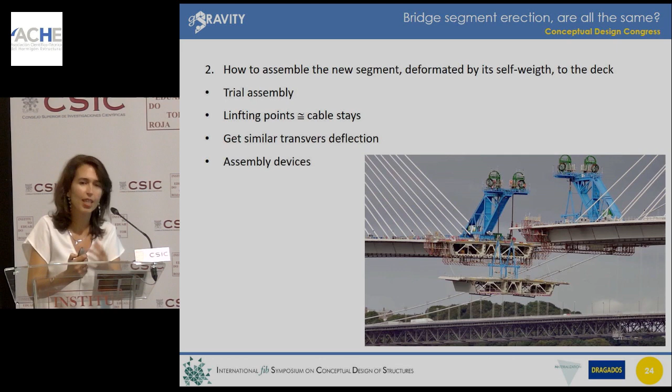So the most intelligent idea is to place the hanging points exactly where the cable stays are. That's the ideal situation, but sometimes this is not possible. So we have to look for the best situation to minimize this difference in the transverse deformation. And it's also important to point out that although we had taken into account all these ideas, sometimes the assembly is difficult, and we need to design special devices that help us to match the splices. So let's see how this problem has been solved in these 4 bridges that we are reviewing this afternoon.

First one, remember, was Cádiz Bay Bridge. In this bridge, the cables were located at the edges of the section, so we couldn't place the hanging points of the segments in this situation because we lifted the segment without the concrete deck, and the segment would not resist the load without the concrete deck. So it was not possible to place the lifting points where the cable stays were. So we placed them in the situation where the transverse deflection was minimum.

And we placed them over the transverse diaphragm because in this bridge there is not a longitudinal web along the whole structure. So in addition, to minimize this problem, we adopted some measures that you have in this sketch here. We place an additional diaphragm at the end of the segment. We place additional webs, also little ones at the end, and we close this lateral box to minimize the distortion of the section. That was in Cádiz Bay Bridge.

In Queensferry Crossing, the problem was also simpler to solve because we placed the hanging points exactly in the same place where the cable stays were. So the shape of the deformation was very similar in the segment and in the deck. In addition, this deck was really stiff, so the deflections were minimum, so this problem actually didn't exist, and the assembly was easy if we compare with the others.

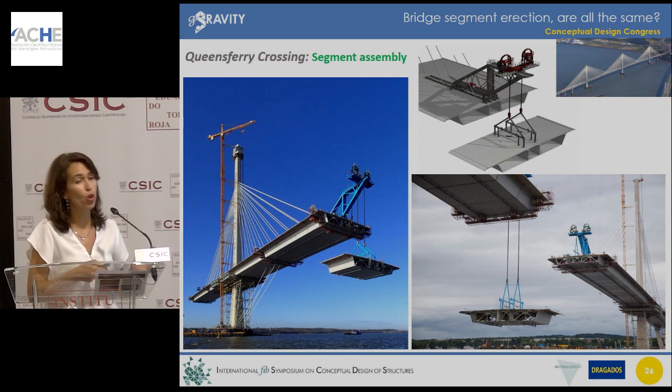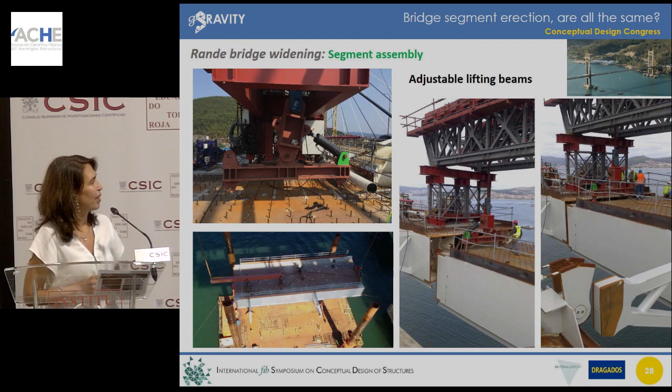This is Rande Bridge. The widening, in this case, the transverse dimension of the segment was not big enough to present any transverse deflection. But anyway, we lift the segment from its center of gravity to avoid rotations during lifting, and also the hanging points were located where the cable stay was. In addition, we have these lifting beams that you can see in the pictures with this transverse jack that allow us to modify the rotation and to perform the assembly and the splice correctly. These lifting beams were located at the diaphragms of the segment to hang the segment from the resistant element.

And the last one, and the most difficult, was the Champlain Bridge. As you can see here, I don't know if you have an idea of how this picture has been taken. We are in the deck, and this is the lifting gantry supported on the 3 corridors. It has lifted a new segment, which is here. So the hanging points here are very close to where the stays are, as you can see here.

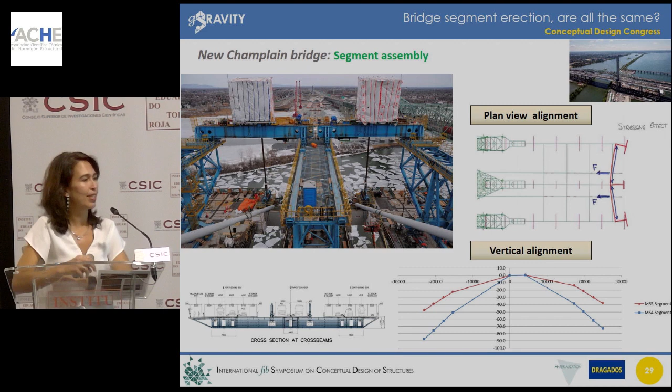But in this situation, although the shape of both segment and deck were similar, the problem here was that the lifting gantry was really heavy. It was so heavy that the deflection that it introduces in the deck was this blue line. So the blue is the deck deformed by the weight of the lifting gantry. The red one is the segment deformed, and you see the shape is similar, but we had to introduce vertical forces to match the splice.

But in addition, in this bridge, we have additional problems because of the structural conception of the structure, and it is that due to the position of the cable stays that were located, as I remember, at the crossbeam and not on the longitudinal elements, the compression introduced in the central corridor was a lot bigger than the compression introduced in the lateral ones. So the problem in the assembly was that we have to align in plan and in transverse the elements that had not the same shape.

So in this case, we had to design a very complex alignment system. We need tailor-made steel structure with PT bars and vertical jacks to match the vertical deflections to perform the splice. But also here in the bottom part of the section, we need also a system with PT bars and horizontal jacks to match the plan alignment and also the transverse assembly.

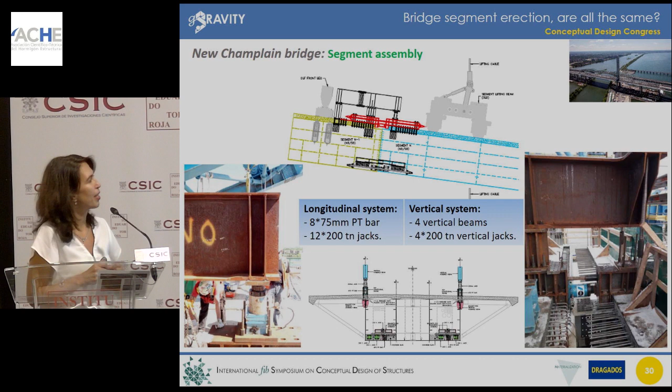So, well, these were the ideas I wanted to tell you. I hope you take into account these points when designing your next cable stay bridge.